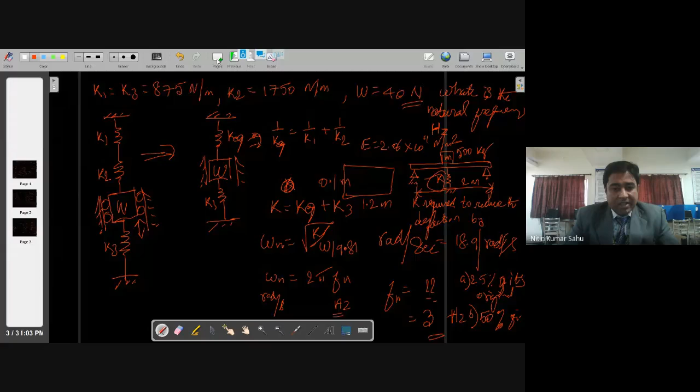He has successfully supervised 4 PhD scholars. His research interests include robotics, smart materials and structures, parallel and compliant mechanisms, swarm robotics, advanced and smart manufacturing, ICPS and IoT, and QC control. He is an active member of various professional organizations including IEEE, ISTE, and SAE.

Sreekumar sir, is currently an associate professor of mechanical engineering and Dean, Faculty Affairs at IIITDM, Kancheepuram, Chennai. With this introduction, I would like to request our expert sir to kindly proceed with the session.

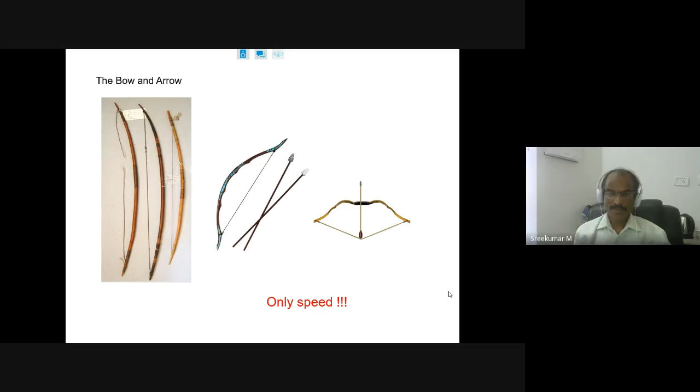First, man started killing animals for food, and they used speed as the major criteria, since bow and arrows are basically lightweight, maybe a maximum of 5 kg. Otherwise it would be very difficult to handle.

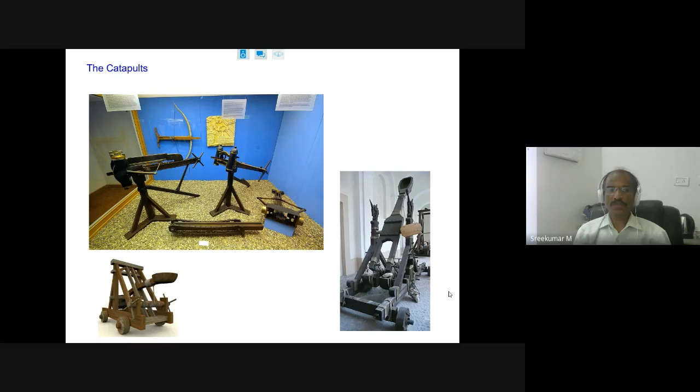Later, mass was also added. Once evolution comes, destruction also comes into the picture. The bow and arrow was first used for killing animals for food, but then destruction and competition came, leading to fights. Then they added mass to the speed - that is nothing but inertia for destruction.

Later, people developed a lot of mechanisms and devices to extract the truth from culprits and to give mass punishments. I've taken various pictures from the internet - one can easily explore further and find devices and mechanisms used for killing people, inducing pain, or chopping off parts of the body, or for capital punishments.

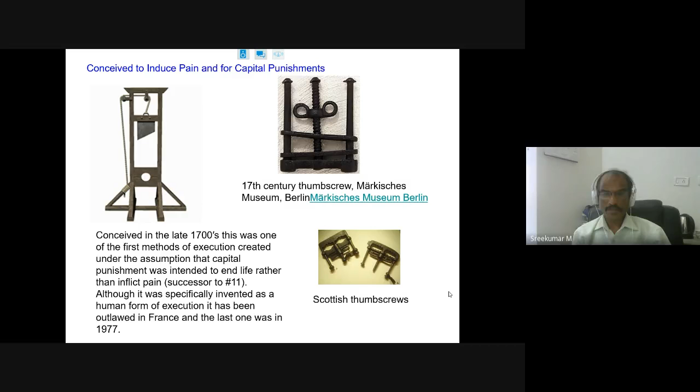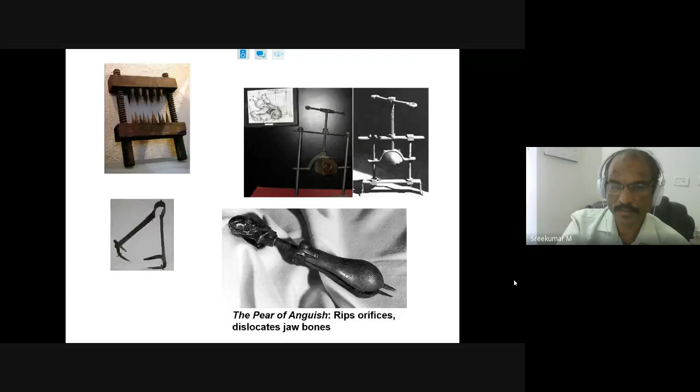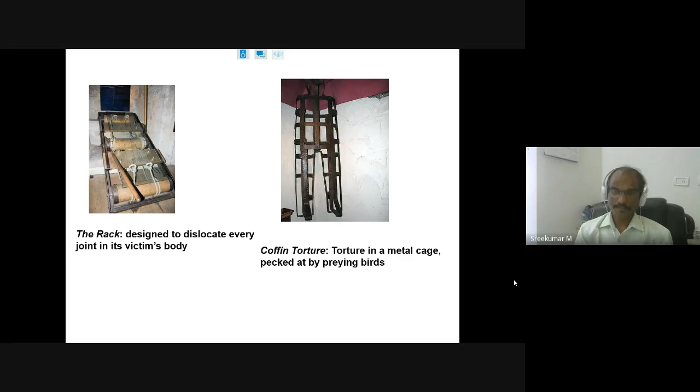All these images have been copied from the internet - there are various websites where one can explore further and find different kinds of information. In the left figure, a person would be laid over the mechanism with legs and hands tied, and when the mechanism is actuated or rotated, it dislocates all the joints while the victim is alive. The right one is a coffin torture, or metal cage, where birds would come and take away the flesh.

This is a kind of information regarding the destruction of humanity. This particular device is available in Italy, and I lived there for a few years.

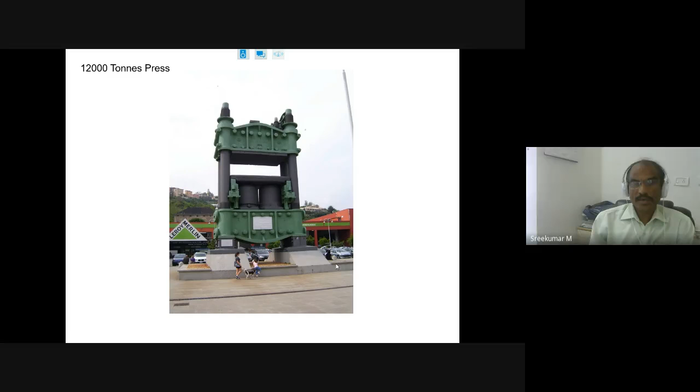This next figure was donated from the UK, it seems - it's a 12,000 ton press. The advantage of this huge structure is that many large pieces could be cast as a single piece. Even though it's about 120 years old, people at that time already had the capability to cast massive structures like this.

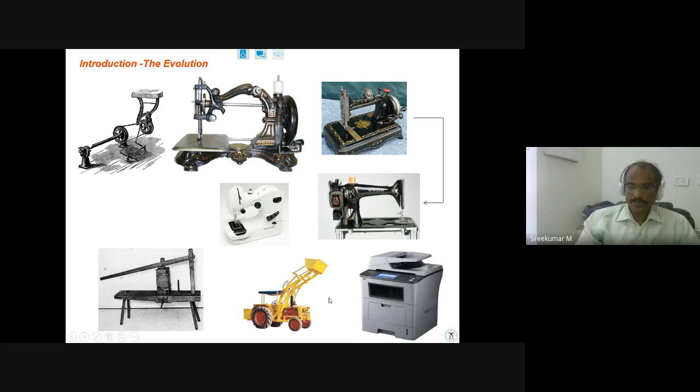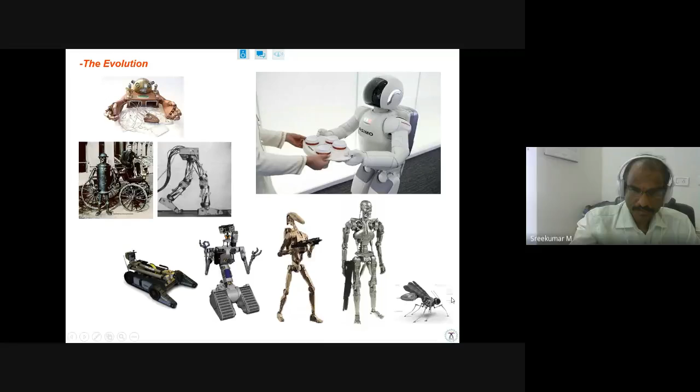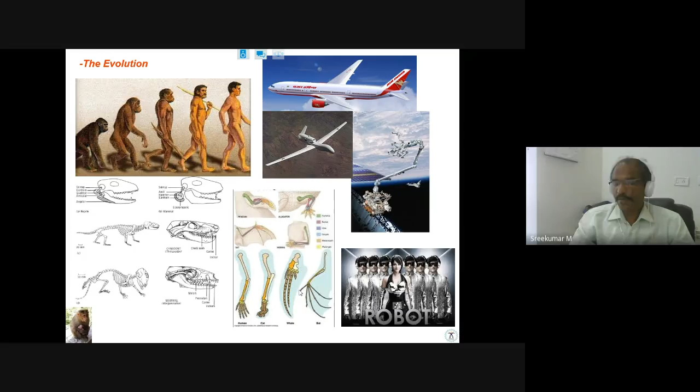This is another kind of development - how to take information from nature, from various biological devices. These are only a few examples I have cited, there are many more, and one can easily get the information.

This is another kind of evolution in robotics - how to give it intelligence, how to design a hand capable of sensing what force I can apply to handle a certain kind of object. This is another kind of revolution going on.

How to design a robotic device as a haptic device, so that you can sense and measure, when a human hand is used to move, or a human head is attached to move, etc.

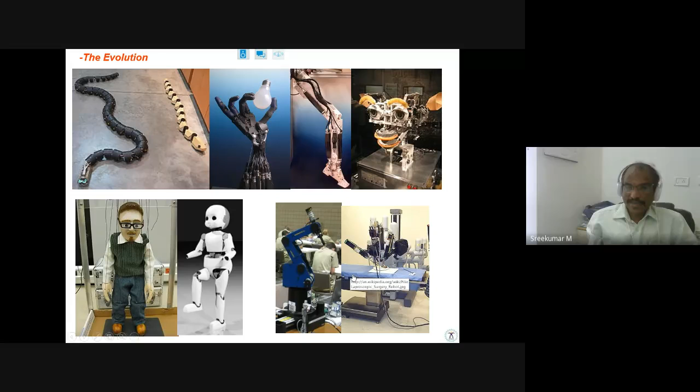This is another kind of development, biological devices, and how to imitate the motion and even the entire action of a biologically available device. We try to copy the same, like the dragonfly and the helicopter. So many things are there.

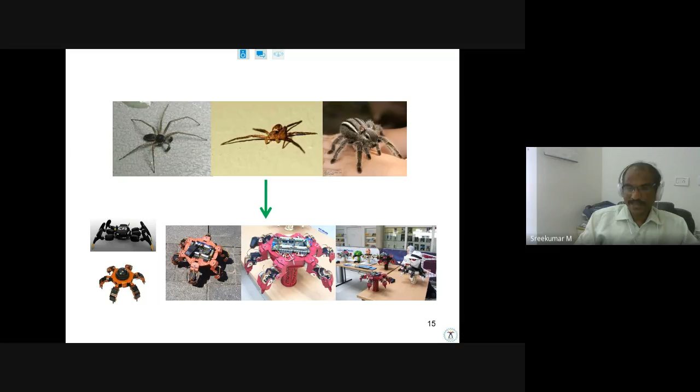Those who work on mechanisms know it - there is hexapod, and they have 6 limbs, and so how to design such kinds of devices like spider, cockroach, etc. That is another kind of evolution.

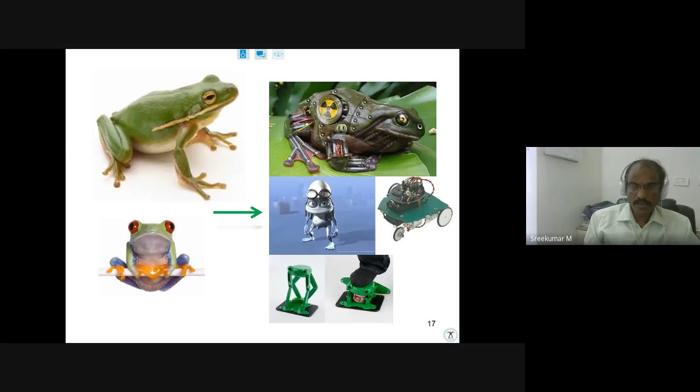So this is how to design a cockroach. Another slide - this is how to design a frog, and how to add a jumping motion to imitate the jumping motion of the frog, etc.

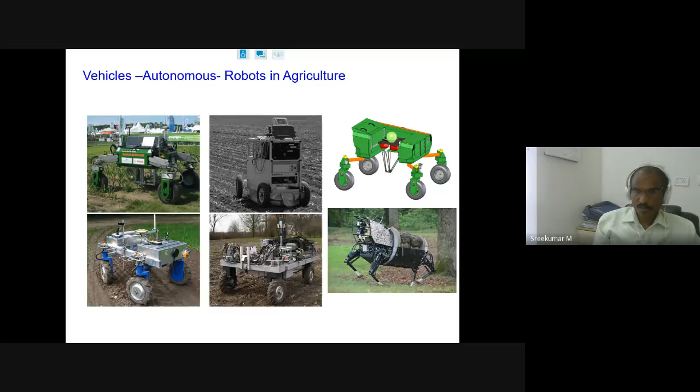Now we have started using it. It is a recent development throughout the world - people started using various mechanisms and devices, or mobile robots, for agriculture. So there is another kind of development.

The recent concept is how to make a group of robots work and act in the field, in agriculture, or in the automobile field in a collaborative manner. This also is a kind of development.

A lot of research works are going on, and those working in robotics in this area might be working with these collaborative robots. This is common even for computer science, electronics, and mechanical students, or IT, etc.

Before this, I want to know - how many of you, any idea from the organizer? It seems it is a mix of participants. How many are from electronics domain? How many are from IT domain? And how many are from mechanical domain? Any idea, any information readily available? Otherwise we can go ahead, so I can orient my talk accordingly based on the participants. Can you give an idea?

How many are from each domain - is it like 30, 30, 30, 30, or is it a mix? If everyone is from electronics and computer science, then I have to reorient. If many are from mechanical and fewer from electronics, I can orient and speak more about mechanical concepts, design, etc. Now please tell me, at least one of you please confirm.

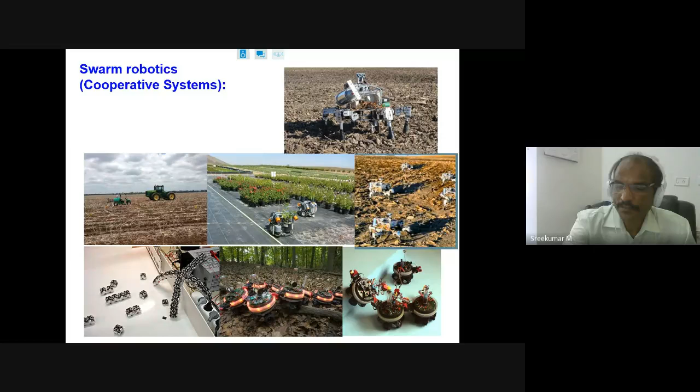Thank you, sir. So if you talk about robots and robotics, there are so many things that come under it - industrial manipulators, mobile robots, and application-specific areas like underwater robots, robots in medicine, robots in space, flying robots, micro devices, macro devices. There are various ways in which you can discriminate between robotic devices.

So if you talk about industrial robots, industrial manipulators are being used in manufacturing and also logistics. There are two classifications: serial mechanisms and parallel mechanisms.

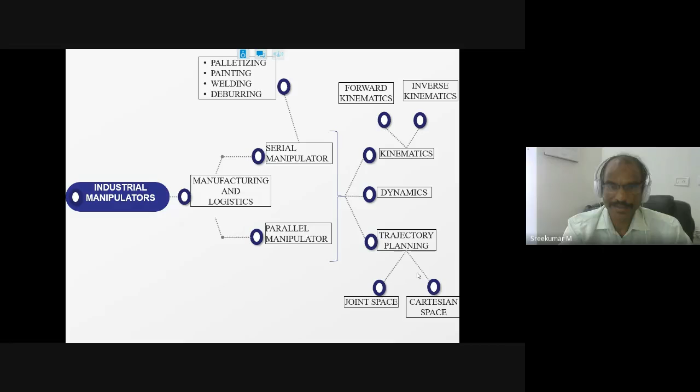There are many design aspects involved that we should incorporate, and without this design information, you cannot make a robot accomplish a particular task. That includes kinematics, dynamics, and trajectory planning, even forward kinematics, inverse kinematics, and then manipulator trajectory, joint space control, Cartesian space control.

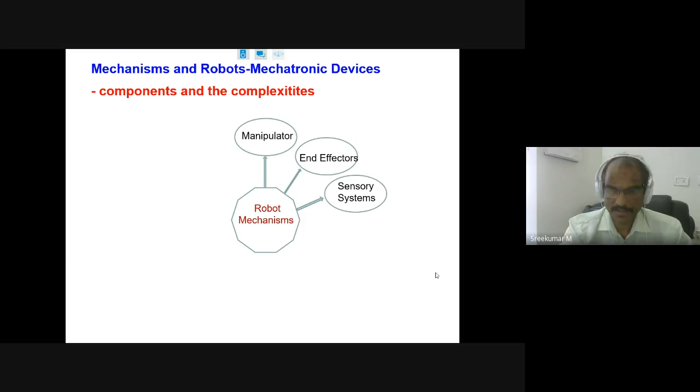There are application-specific designs like palletizing, painting, welding, deburring, and pick and place operations. If you talk about robot mechanism, there are manipulators and end effectors, and sensory systems attached with the mechanism, and there is a power source.

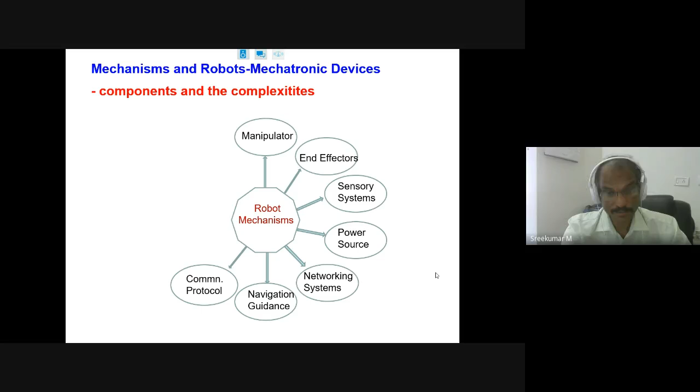Sometimes the power source, if it is a mobile robot, even the mobile robot has to carry the power source. There are networking systems, navigation and guidance, common communication protocols, and multi-system or multi-agent approaches. So many things are now being evolved, and there are various kinds of control systems.

There is linear control system, non-linear control system, fuzzy control system, and genetic algorithm, fuzzy optimized genetic algorithms, so neurofuzzy. So many things are happening every day as far as robot controls are involved, and there are coding experts coming from the computer science domain, and still even sometimes in mechanical too.

Of course, there is multi-robot or mobile robot means there is a leader-follower approach, and there are obstacle-related issues, stationary obstacle issues, and moving obstacle issues, like ditches, like rivers with water and with ice.

With the incline, with the upward inclination, with the downward inclination, there are so many things, and every day people try to make a single robot capable of meeting or moving in different terrains. Many companies are now developing various kinds of devices capable of moving in various kinds of terrains.

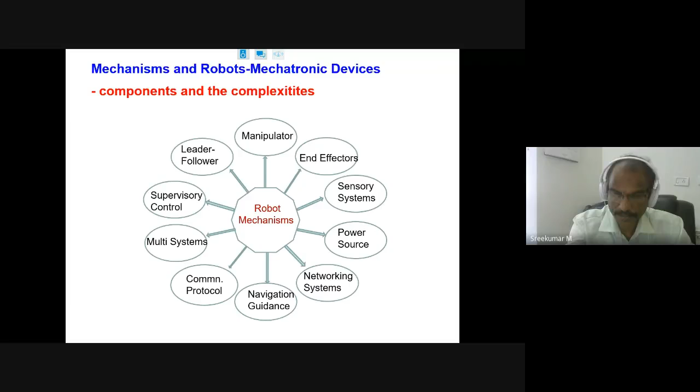And if you talk about the types of mechanisms, there are serial mechanisms, parallel mechanisms, spatial mechanisms, spherical mechanisms, planar mechanism, redundant, compliant, flexible, etc.

What is this? Mechanical participants, you know what a planar mechanism is. A planar mechanism is capable of giving only 3 degree of freedom motions. What do you mean by degree of freedom?

Degree of freedom - because when you talk about robotics, you should know this. A planar mechanism is capable of giving only 3 degree of freedom maximum. Planar means anything that moves on a table, assume that. You can have an X motion, you can have a Y motion, and you can have a rotary motion with reference to the orthogonal axis Z - that is rotation with reference to the third axis, the Z axis.

That is planar. And spherical - assume a mechanism is developed that is capable of navigating over a sphere, in a spherical space, that gives a spherical space. And then what is spatial mechanism?

Spatial - if you want to maneuver a body in space, how many degrees of freedom are required? You want to move a body in space, in air space, and how many degrees of freedom are required? Assume it has to move in space - how many degrees of freedom can it have, or how many are required?

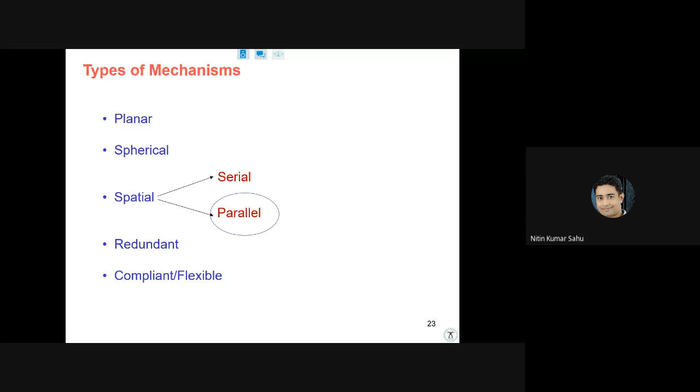See, take this color, take a calculator, and I'm holding it in my hand. So X motion is possible, Y motion is possible, and Z motion is possible—X, Y, and Z, 3 linear motions are possible.

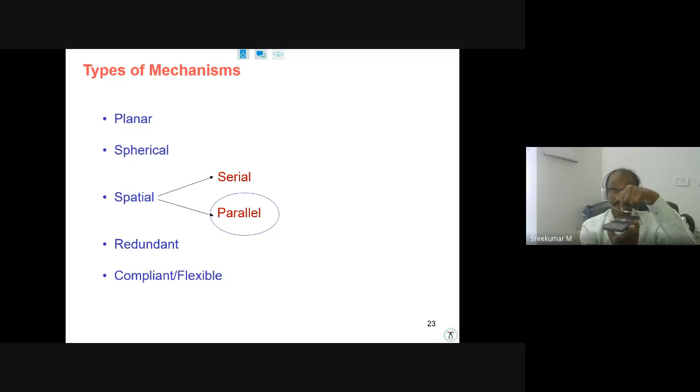Now with reference to Z, I am rotating—correct, the 4th degree of freedom. Then there is an axis here—if you put an axis, now I am rotating this way, and another axis is here, so I rotate this way too. All 6 degrees of freedom are completed. So our hand is capable of having 6 degrees of freedom.

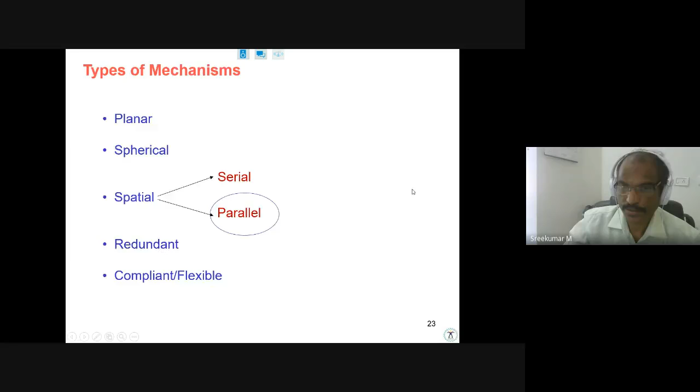So our hand is having how many degrees of freedom? 7 degrees of freedom. And how does this 7 degrees of freedom come about? Let me go to the board to explain. My board is visible—yes sir, visible. So now see, I'm drawing our hand.

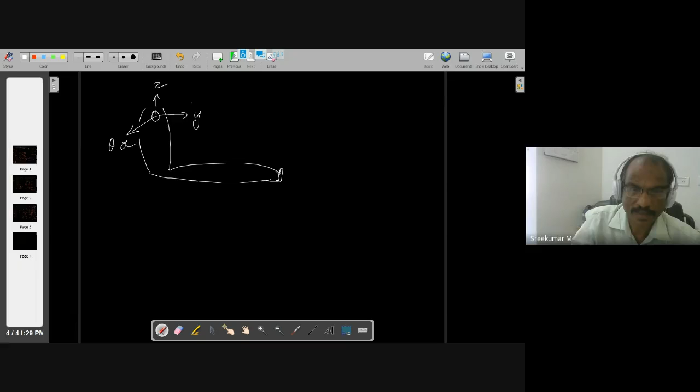You got the shoulder—so it is like a manipulator now, I'm drawing. Here is a ball and socket joint, correct? It's a ball and socket joint, so it's X, Y, and you can fix 3 axes. With the ball and socket joint, you get 3 rotations: theta X, theta Y, and theta Z—3 degrees of freedom are available here.

Then there is an elbow joint, and you get one rotation—1 degree of freedom available there. Then you can put another joint: you can revolve 1 degree of freedom, move this way 1 degree of freedom, and move up and down—so 3 more degrees of freedom. So nowadays, 3 plus 1 plus 3 gives you 7 degrees of freedom. The human hand has 7 degrees of freedom.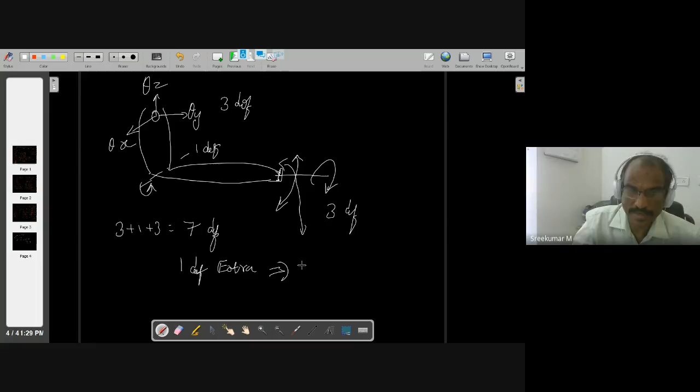So we have 1 extra degree of freedom—our manipulator, our hand, is a redundant mechanism. God has given one more degree of freedom because this extra degree of freedom is useful in picking an object with the concept of obstacle avoidance.

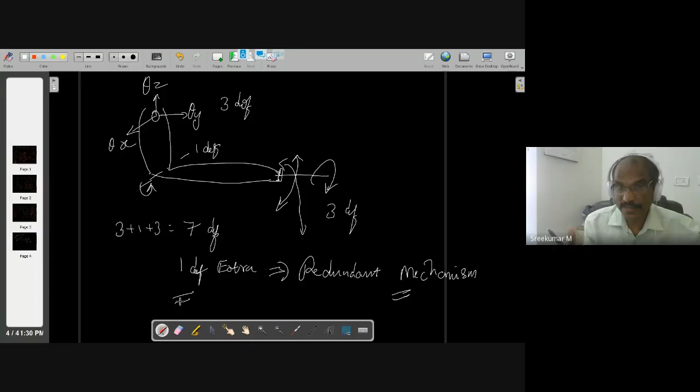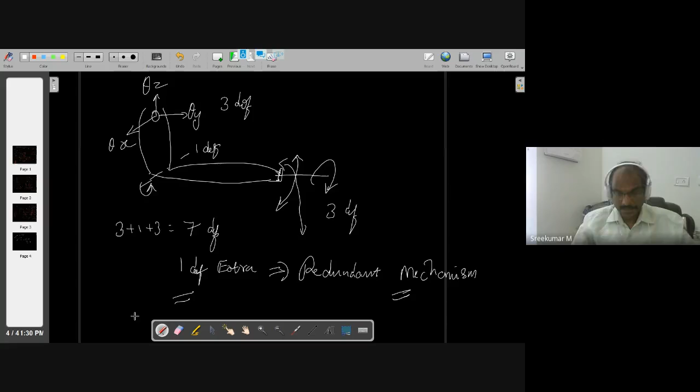For example, if you are standing and drawing open a table drawer, navigating inside and searching for something, or placing something inside the drawer and positioning it, then 7 degrees of freedom is required. Anyone can easily check such applications where the 7th degree of freedom is useful. That is why God has given 1 extra degree of freedom, even though 6 degrees of freedom is more than sufficient to maneuver an object in space. Okay, so we'll go back to the slides.

Right, okay, so now degree of freedom. We will spend a little more time here. This is the serial mechanism, and it is a spherical mechanism, and we have a parallel mechanism, and our skeleton itself is a hybrid robotic structure.

We are hybrid type, we have the leg. Each leg is a serial mechanism, each hand is a serial mechanism. Put together, our 2 legs are connected with a hip joint, and our 2 hands are connected with a skeleton. So altogether, you can say it is a hybrid mechanism.

What is a parallel mechanism? If two serial mechanisms connect like this, it is an example of a parallel mechanism called a Stewart platform. It is having 6 limbs, like a piston cylinder, pneumatic cylinder or hydraulic cylinder. There are motors as well, but we are not going in depth.

It is like a pneumatic cylinder, and top and bottom there are joints, and like this there are 6 limbs. It is basically a 6 degree of freedom mechanism, also called a parallel mechanism, because so many actions are parallel. That is the reason it comes under parallel mechanism.

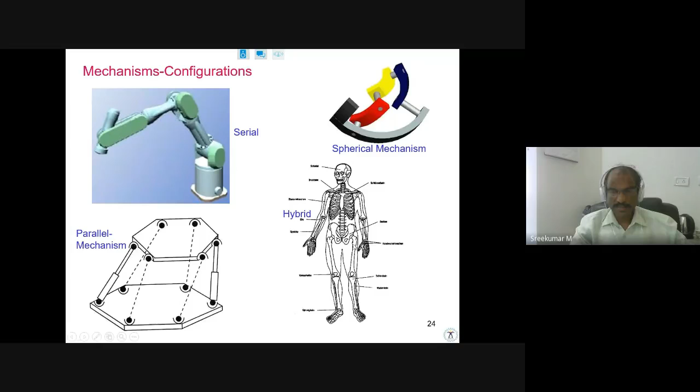So our skeleton comprises serial mechanism as well as parallel mechanisms. For example, if two serial mechanisms are connected using a common space or platform, that is known as a parallel mechanism. Our skeleton comes under hybrid type.

There are different kinds of parallel mechanisms and serial mechanisms developed, and many mechanisms come under compliant mechanism also, compliant flexible. That information we will discuss a little bit later.

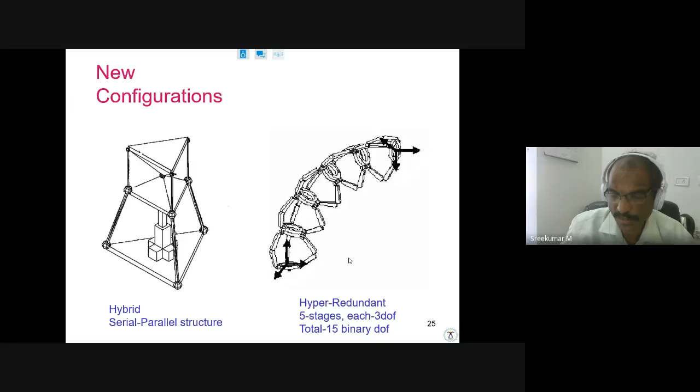There are various configurations, even stacking one over the other, and you could see it is hyper redundant. Many more degrees of freedom are available, more than 6 are available. There are mechanisms having up to 15 degrees of freedom.

If you talk about the fundamentals of any robotic devices or a robot, what is the explanation, what is the definition of mechanism? The word robot is an extension of mechanism, or you can say machine. What is the definition of a mechanism? One of you please come out with the definition of the mechanism.

Mechanism, yes. Any definition? It is a kinematic chain in which one link is fixed and it has a defined motion.

A little bit more information: it is basically an assemblage of links and joints. You are assembling various links and joints to form a kinematic chain, and one link is fixed. For example, a ball and socket joint is attached with a structure, so basically one link is fixed.

It is designed for transferring motion, force, moment, torque, etc. That is the basic definition of the mechanism. It comprises various links and joints: unary link, binary link, ternary link, quaternary link, and multiple links, etc.

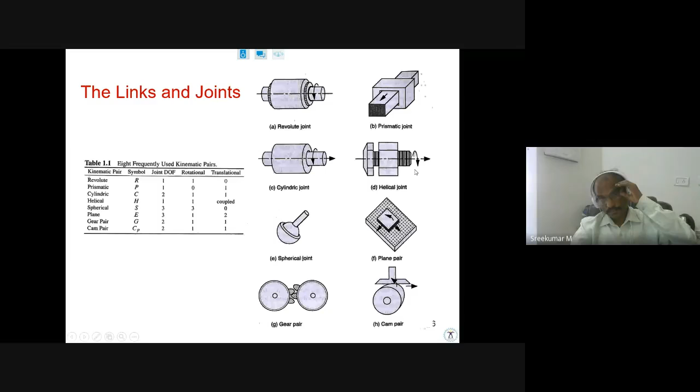Here, see, 2 arrows are mentioned, but how many degrees of freedom are available for the helical joint? The helical joint is 1 degree of freedom, but here 2 arrows are mentioned. How? Say cylindrical joint, 2 arrows are mentioned, it is having 2 degrees of freedom, but the helical joint, there are also 2 arrows - one for rotation as well as for linear motion, but it is mentioned as 1 degree of freedom. How?

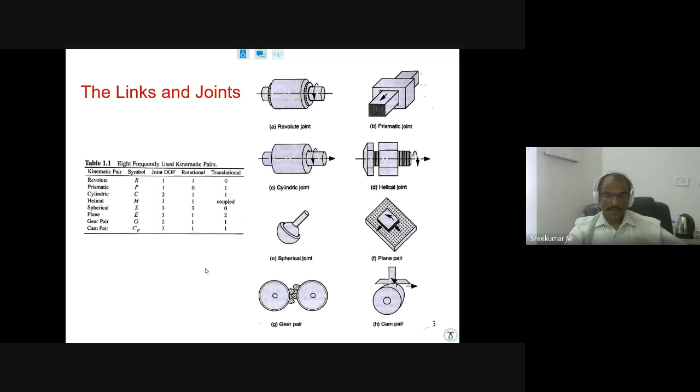What is a universal joint? I think this universal joint is not covered yet. One more joint is called a universal joint. You could see this joint before the differential in trucks and buses, at the rear wheel, in the middle, where you get a box.

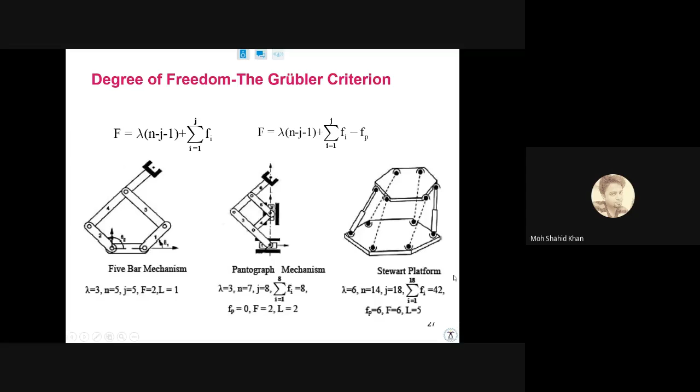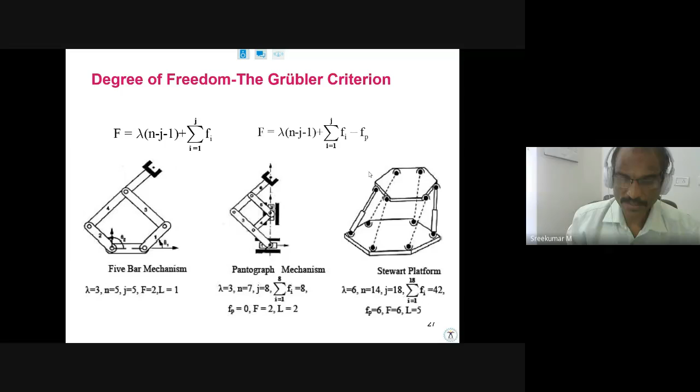Sir, you are not audible. I think there's some loose contact. Hello? Now you are audible, sir. Please alert me in case of any issue. How long was it? Just a few seconds, they were not audible. Okay, now it is fine, right? Okay, fine.

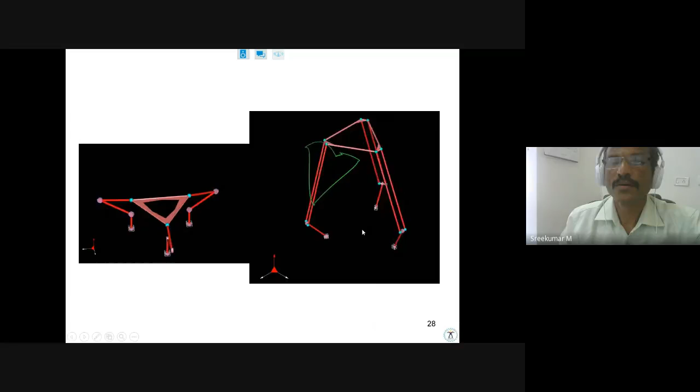When you start designing things nowadays, all the students are using freeware software. There is a linkage, and there are so many free softwares available for designing mechanisms. You can simulate the motion, see whether all 6 degrees of freedom are available, or how many degrees of freedom are possible, which is not available, and how to redesign it. Everything is possible nowadays using available simulation softwares.

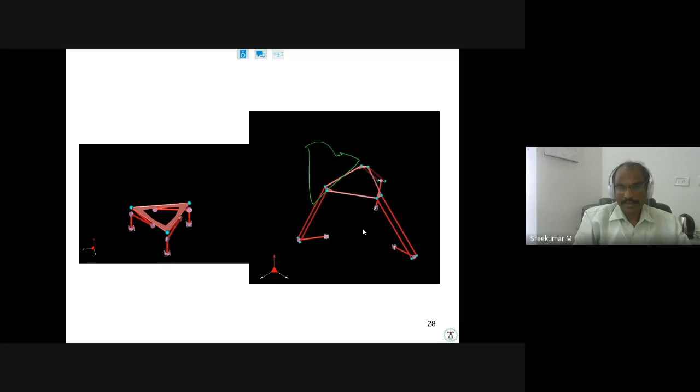Every institute has developed something similar. For example, Professor Saha of IIT Delhi developed a software that many people started using. There are many free softwares available that one can easily explore and utilize to the maximum possible extent.

So these are all things one can easily see. The video is not available here, so let's move on to this.

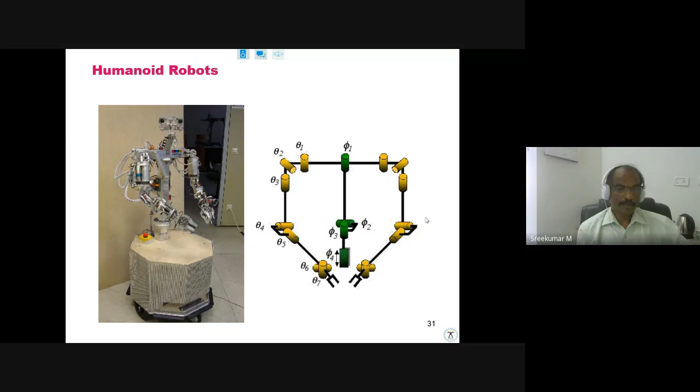If you talk about humanoid robots, the design is very complex. People show humanoid robots, but their design is very complex when imitating motion. There are a number of motors, and even imitating a single hand is very difficult, so mathematical modeling is very important. This slide is only to throw some light on to what extent the mathematical modeling is complicated with many degrees of freedom.

There is another domain where, when you miniaturize a robotic device into a smaller version, the classical links and joints will not come into picture. If you replace those classical links and joints with compliant devices, there are compliant materials available, and such materials are called smart materials.

What is a smart material? What is a smart sensor? What is a smart actuator? We will explore this, though I won't spend too much time since I have another 30 more slides. The time is 1:44, and I try to close before around 2 o'clock.

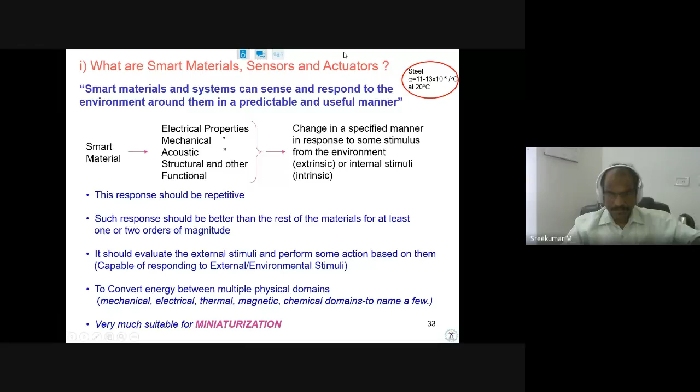There are smart sensor systems capable of adaptive self-sensing. They possess self-adaptability, self-sensing capabilities, memory, and special decision-making capabilities. Another domain is smart structures - many robotic devices incorporate such sensor systems and smart structure systems. If a structure is capable of acting like a sensor, actuator, and along with a controller, then we can call it a smart structure.

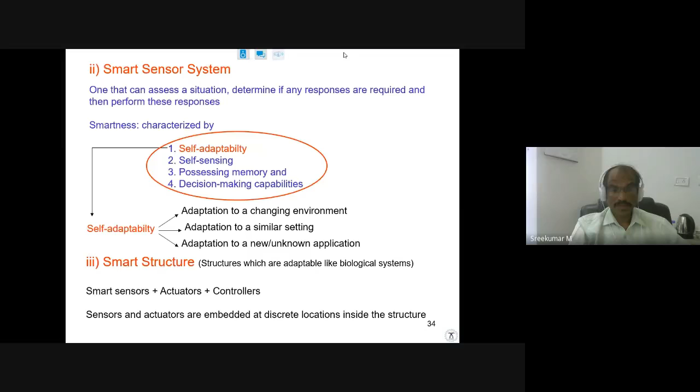There are MEMS devices, smart MEMS devices, and many people are developing compliant smart MEMS at very micro scale objects.

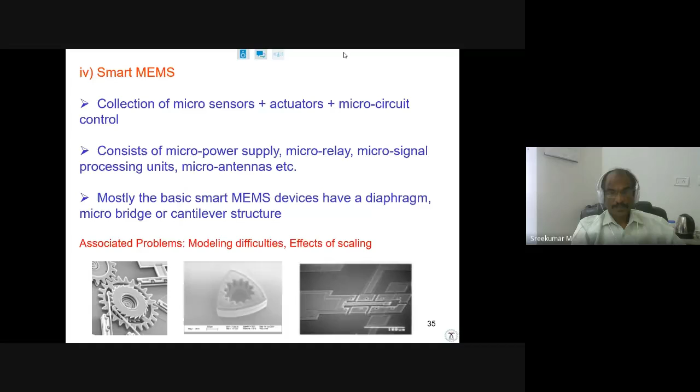The notable smart materials that could be used in the robotic area - there are of course other devices, but the two notable ones are shape memory alloys and electroactive polymer actuators.

The shape memory alloy's function is: if you heat it, the length will get reduced and the dimension will shrink. There are other aspects without heating too, but overall, if you heat it, it shrinks, and if you remove the heat, it expands - the length or volume increases. That is the basic information for shape memory alloy.

For the shape memory alloy, for example, initially the dimension might be 100 mm. When we heat it, it goes back to 90 mm. Once the heat is removed, it comes back to 100 mm. That is the reason we call it a shape memory alloy.

Electroactive polymer actuators function basically like a cloth. There is a polymer layer in between, with electrodes sandwiched on the top and bottom.

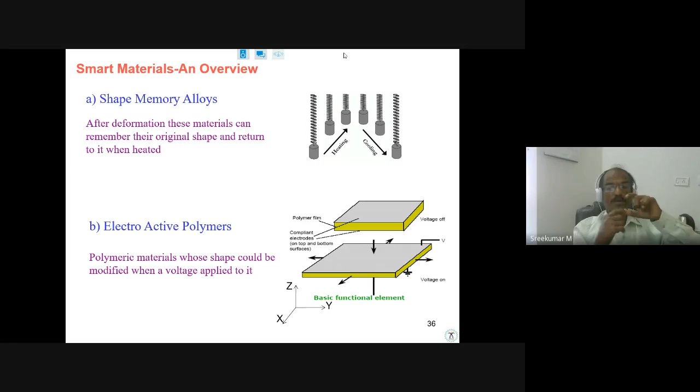If these electrodes are connected with power, they work like a capacitor. What will happen? There is a development of Maxwell forces between the top electrode and bottom, they try to attract. Due to this attractive force, the middle soft polymer layer squeezes. So in the x direction and y direction the size gets increased because the thickness is getting reduced.

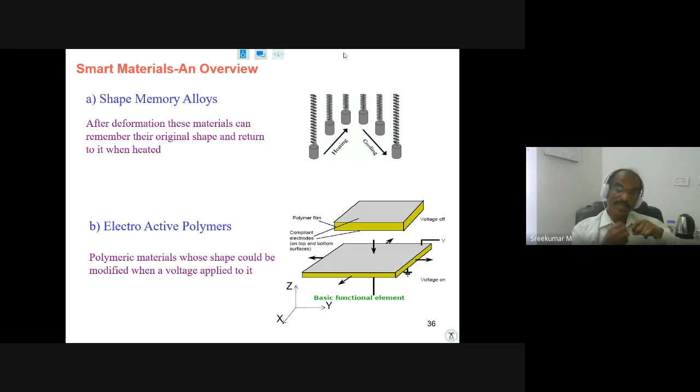This motion can be explored further in the development of robotic actuators. They are called electroactive polymer actuators. And there are other devices also like piezoelectric materials, electrostrictive, and magnetostrictive materials.

They change in their shape when they are subjected to a magnetic field. Similarly, electro-rheological and magneto-rheological fluids and solids exist. What are rheological properties? Density and viscosity are the two basic rheological properties of fluids, solids, and semi-solids like grease etc. Where such smart materials are subjected to electric or magnetic field, their density and viscosity will change. They are called electrorheological and magnetorheological fluids and solids.

And there are various other sensors and devices, thermochromic and photochromic materials, which respond to temperature or change in color, and pH sensitive polymers. There are also diagnostic devices used when we test glucose level or do pregnancy checking, this technology is being utilized.

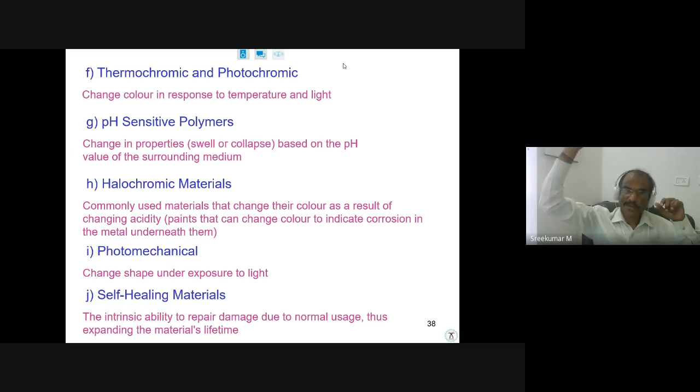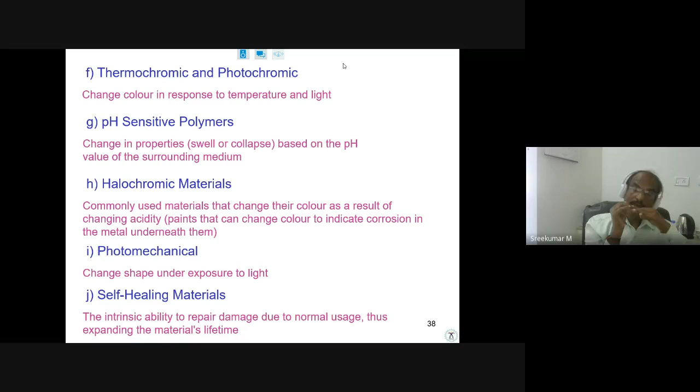There are also halochromic materials, photomechanical materials, and self-healing materials. What is a self-healing material? Suppose a structure is erected very tall, and it is very difficult to go to the top, and the top is subject to wind loads, there is a possibility of crack formation. If a paint-like self-healing material is applied, and there is a crack, the material penetrates inside the crack and makes the structure intact. They are called self-healing materials.

There are many smart car manufacturers incorporating such materials. You can easily explore further.

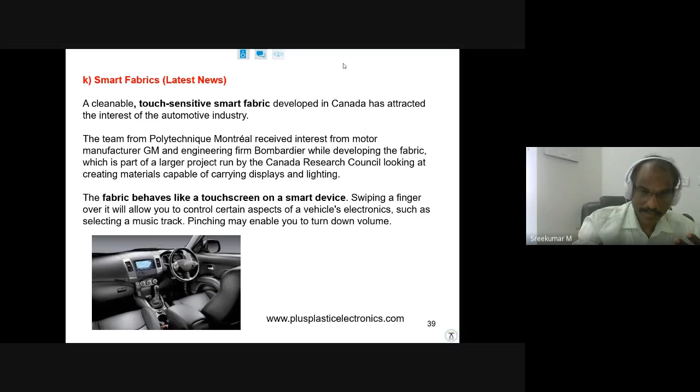There are various hydrogels. In aged persons, lubrication properties get diminished during aging, so these kinds of gels are being injected between the knee joints especially. These medical grade gels are another area.

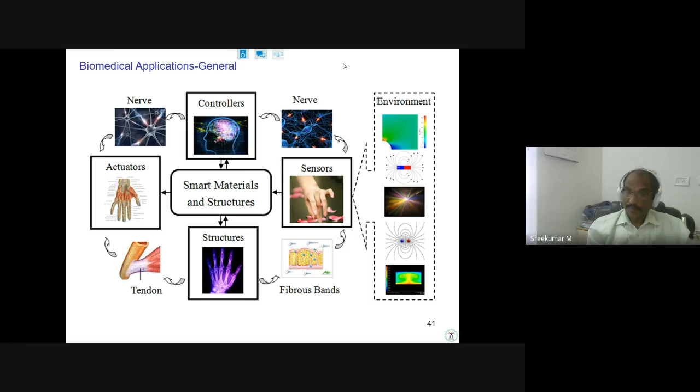There are various other medical and biological areas where biologically available materials are being used, like artificial fingers and tendons in various surgeries. There are materials being used even like nerve sensors, and this area has already grown and new materials are coming up every day. Please explore further if anyone is interested.

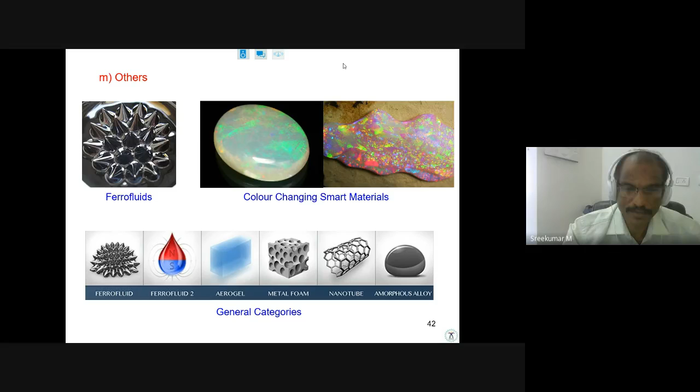There are ferrofluids, color changing smart materials, and other general categories, including ferrofluids, aerogels, metal foams, and carbon nanotubes. This is another kind of development.

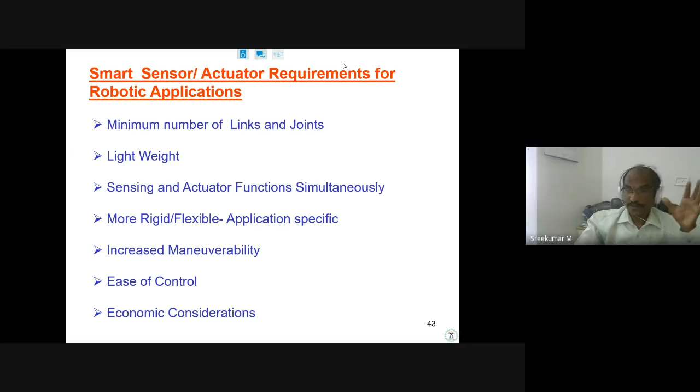When you incorporate smart materials or smart systems in robotics, various factors need to be considered: how many links and joints you want to reduce or increase, what is the weight, whether maximum weight is allowed, sensing capabilities needed, what extent of flexibility required, capabilities like degree of freedom, control issues, and cost. There are many factors one has to consider during the design phase.

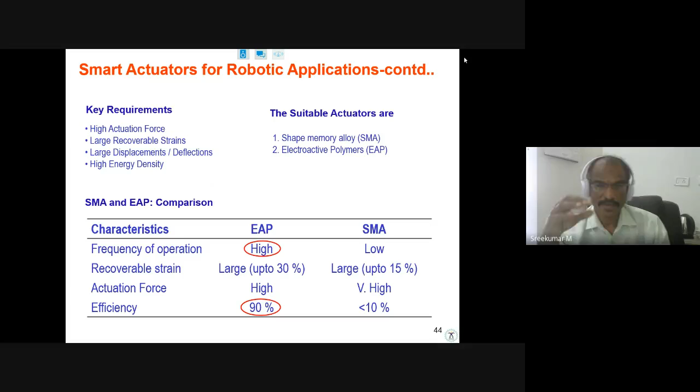I already said two materials are capable of giving more information for design, facilitating design of micro devices: shape memory alloy and electroactive polymer. Each one has some plus points as well as negative points.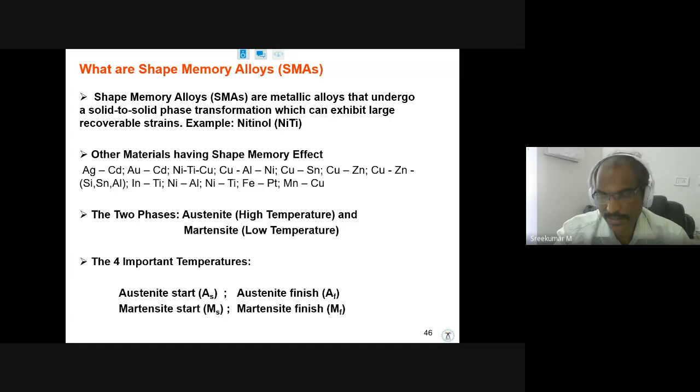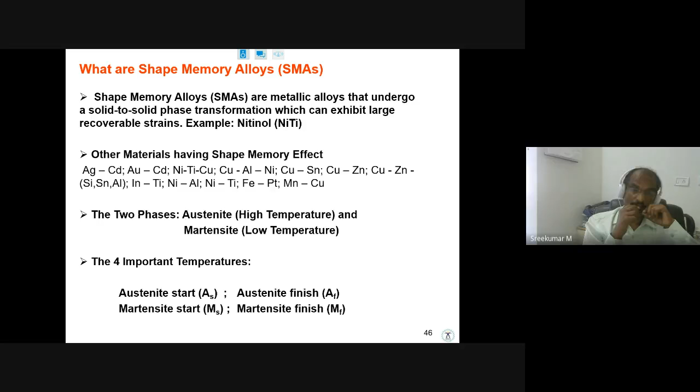There are so many things associated with shape memory alloys, which I'm not discussing now. There are various smart materials; nickel titanium is the basic material, for example orthodontic clips use shape memory material, or nickel titanium copper for increasing flexibility of wires and clips. Orthodontic clips add copper, it is a smart material, an SMA material.

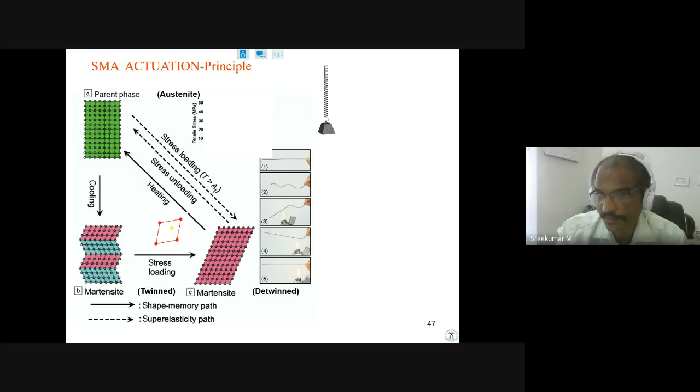There are other materials too, and there is a basic functionality to explain the SMA actuation principle. If you heat it, it will go back and reduce or increase its dimension. This is an example to explain how SMA actuation can happen. If you take a 100 mm wire, elongate it by applying a force, and then remove the force, it will remain 110 mm.

If you heat it, it will go back to the original shape.

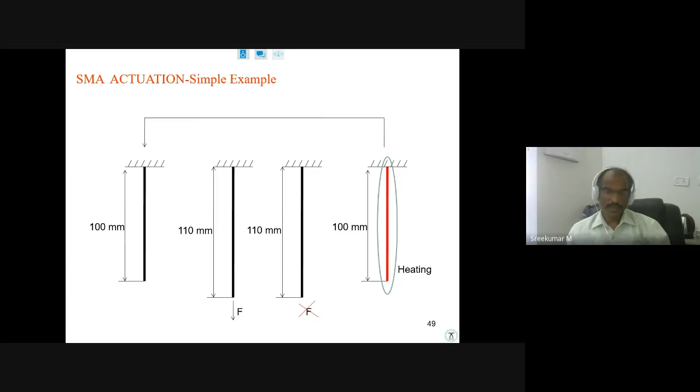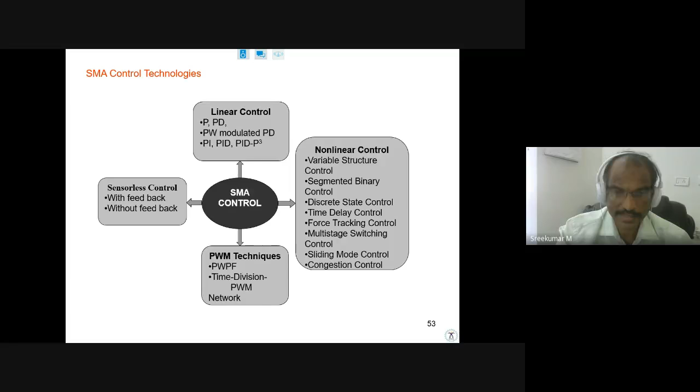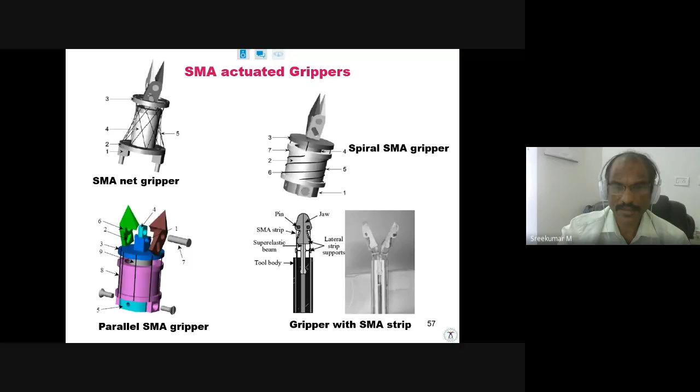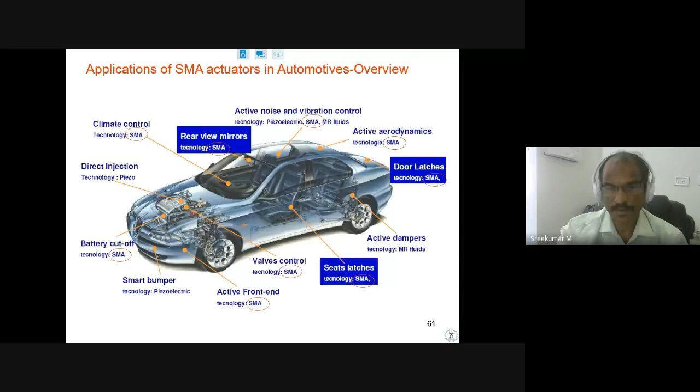So this is the information, and there are other things too: various kinds of chip and relay wires, heating and cooling technologies that people are using, various control strategies, feedback systems, and applications. All these things are being used, along with various valves and devices.

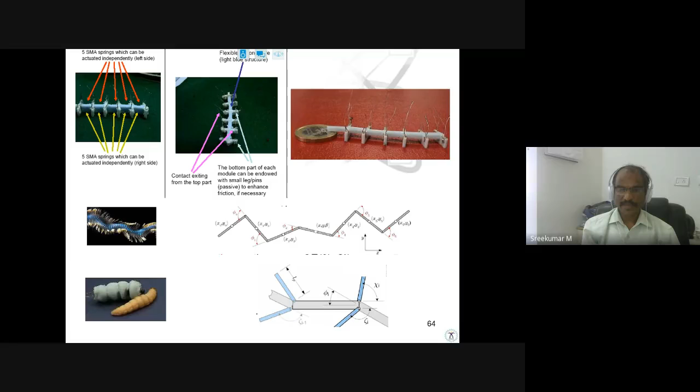Micro grippers and fish-like devices, SMA actuated grippers, robotic devices, colonoscopic devices, compliant devices, and various applications in cars, biomimetic sites, and modular type devices. For example, if you want to copy the motion of a snake or earthworm, you design it in modules, and each module needs to be connected. There are mathematical issues involved there.

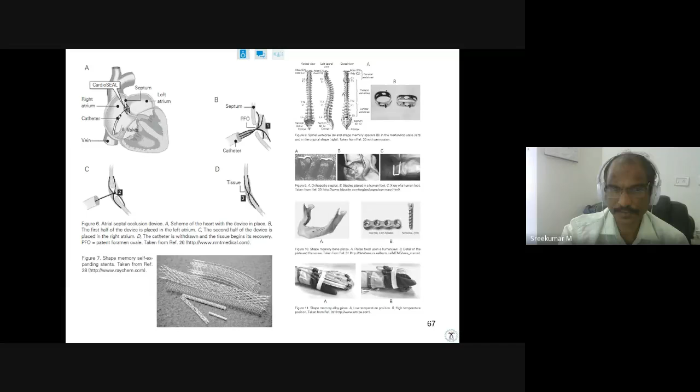And various medical areas, one can use various kinds of robotic devices developed based on smart materials, etc. There is pedicle fixing that is being used in smart surgery, etc., and various electroactive polymer devices.

We have said two materials are important: one is shape memory alloy and the electroactive polymer actuator. These two are the suitable materials in the development of robots and robotic devices. If you talk about electroactive polymer, there are ionic electroactive polymer actuator devices and electronic ones. There are two categories, please explore further.

I already said the working principle of the electroactive polymer actuator is like a capacitor. If the top and bottom electrodes are powered on, then it will shrink. That property is explored in the development of actuators. There are devices like EAP capsules, and devices developed based on artificial hands, using this EAP technology.

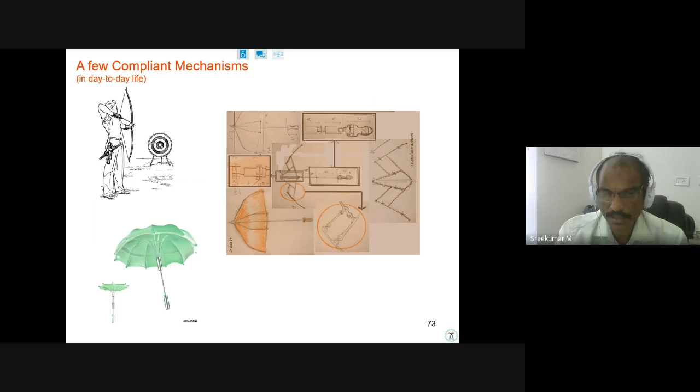So there are compliant devices. Even an umbrella itself is a compliant device, and there are kinds of compliant devices and grippers, developed by Professor Ananthasuresh of IISc Bangalore. Every institute, I think, people are developing a lot of things. This is taken from his website, so you can explore further; sir is developing a lot of devices and working in the compliant mechanism area.

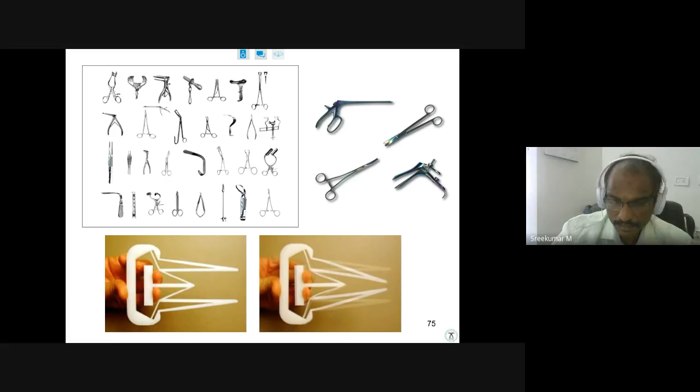These are surgical grippers, normally used, and now people are finding ways to convert them into compliant devices. Such mechanisms are used in grippers for handling soft tissues like kidney, heart, lungs, etc. With metal surgical tools there is a possibility of damage and bleeding, so if you replace those devices with a compliant device, the safety of the surgery will get ensured.